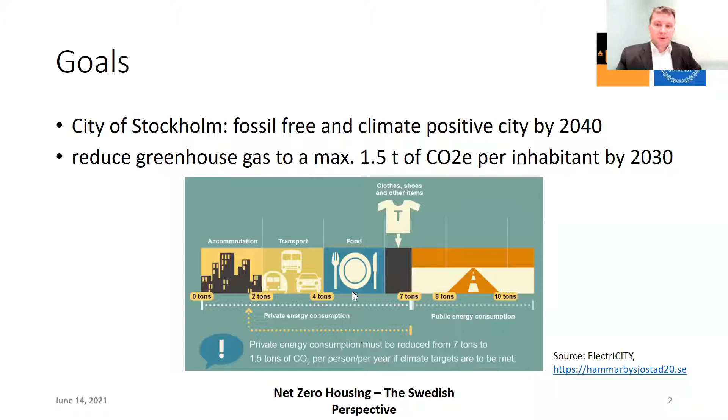So the agenda for today is that we want to look at the users at the beginning. And Elena, welcome. She's a researcher at KTH, and she's connected to the Living Lab here on campus and outside of the campus as well. She will introduce how environmental behavior is driven by consumers, how smart buildings are connected with that, and how we can learn from our experience, mostly from the KTH Living Lab project, where we can test services, products, and methods in real buildings with our students who are living in these buildings.

Then the next speaker, Christina, works for the city of Stockholm, and she will talk about one of the development projects which is still going on. It's not finished, in the district of Norra Djurgårdsstaden, or the Stockholm Royal Seaport in English. And she has insights from the city perspective on what to do for a new development project.

Then the last speaker is Jürgen. Jürgen is responsible for an initiative for the redevelopment of an already developed district in the south part of Stockholm, Hammarby Sjöstad. And he will speak about the lessons learned, because they had a very ambitious aim. They wanted to be twice as good as the city on energy and sustainability targets when they started the project around 20 years ago. And then they realized that it was not possible to reach all the targets.

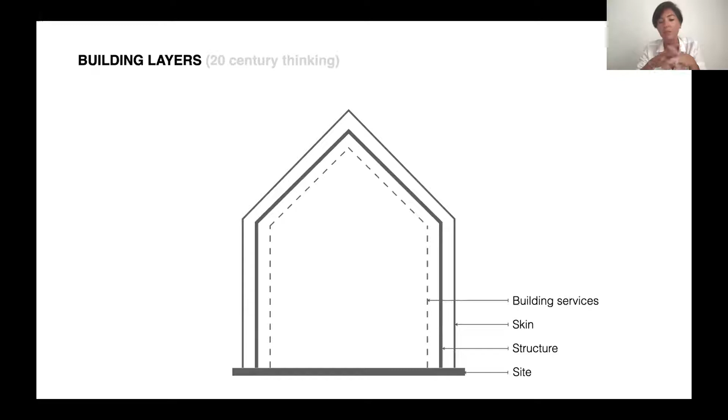The 20th century mindset is about seeing the building as a system of layers, which are site, structure, skin, and building services. That's how we normally create our vision of the building, and that's where we try to create standards, regulations, frameworks and methods around this part of the building. But in the 21st century, a big role in development is played by our lifestyle and how we interact with our environments.

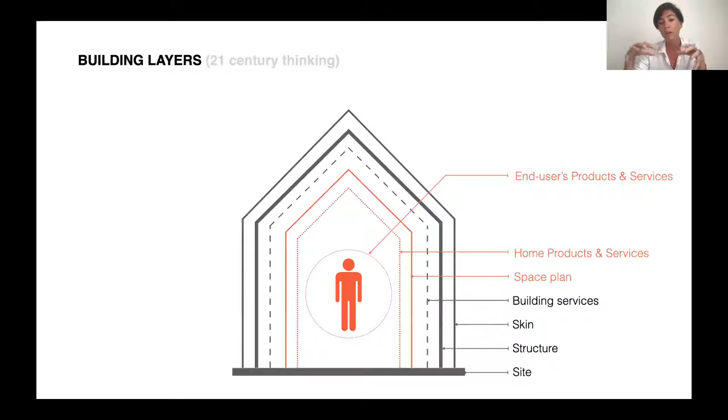That's why we tried to focus not only on the building as a system, which we know previously, but also to understand better how we interact with different parts of our building, which types of products and services we use as individuals, and also a big thing happening today is end user product services. I mean, when my Apple Watch talks with my lighting system, is it building or not? It's a kind of communication which is growing, and that's why we decided to add this as a layer to research.

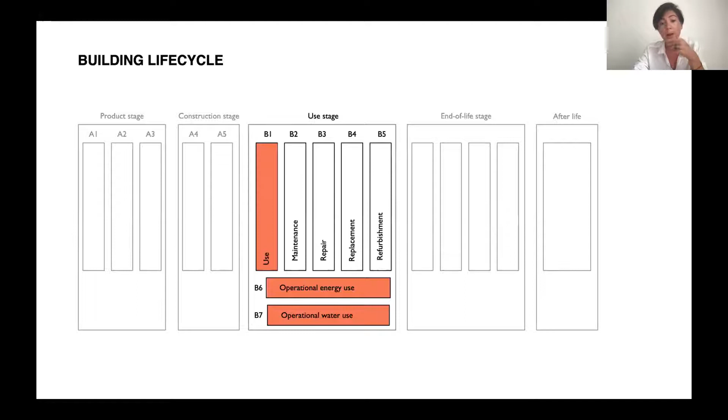And of course, we all know about the building life cycle, and a lot of studies mostly focus on the sustainability aspect of the production stage and construction stage. But now we are moving more and more to the use stage. My research mostly focused on use of the building, with a specific focus on end use: energy end use and water end use. And that's where I found that I need a platform where I can have good access to end users, because if we talk about the building operation stage, I need to really be able to communicate with end users.

And that's how I found that a fast growing track in academia and applied science is living laboratories, which are user-centric open innovation ecosystems. They normally operate in a real life context, they have multiple stakeholders, and they follow R&D procedures and methods. It's a lot about co-creation and interaction between different stakeholders. So that's why I started to search which lab I might land in and do my study in.

But before this, I also researched that the living lab is not just something that's happening now. Historically, we had different stages of this type of process. It actually started in Sweden in the 70s. It's called cooperative design, when Electrolux asked their employees to open the doors of their homes to research how they cook, how they clean their home, and just do analysis of end users' behavior.

Then in the 80s, it moved to some kind of social movement when people gathered and together decided what they want on the street, in their district. And America was full of these examples. For example, the Pecan Street project, where collectively people decided to change their built environment.

Then lately it moved to more like IT garages, where you really could build something and test with end users. And we all know about Google, how it was made on campus, the iterative process of testing. And now what's happening is actually this living lab environment, mostly related to city landscape, where we try to pilot the bigger complex systems of humans, of technology, of landscapes, of environments.

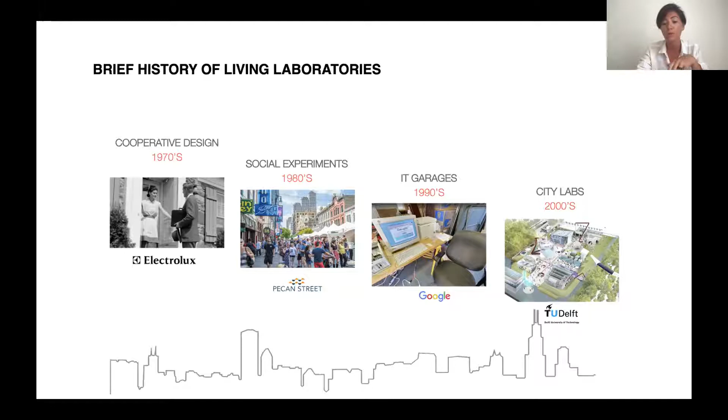And 5 years ago, I started to search which lab I would like to work with. And one lab which I specifically found very interesting is Living Lab at KTH here in Sweden. And I directly signed in that I really would like to do my research here, and that's where I started.

But Living Lab is in many buildings. I specifically focus on one of the buildings in our portfolio, which is built by Einar Mattsson. And this is a building of 300 student apartments, where 4 apartments are classified as research laboratory. It looks like apartments, but it is a laboratory where people are allowed to live. And that was my setting.

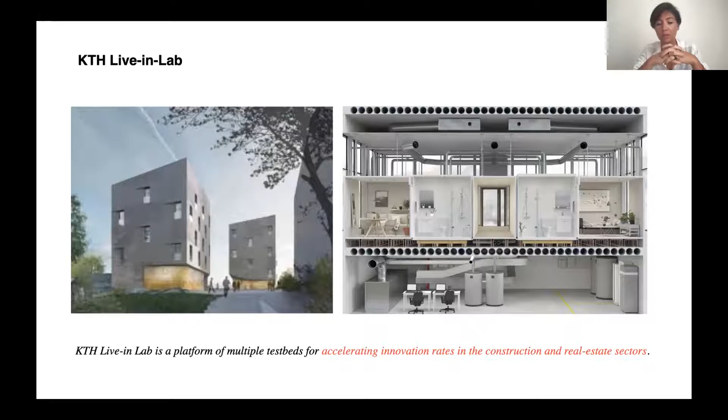I needed to define how I can do my study about behavior and built environment, and I defined also services in this context. And when I started to observe trends and different systems from the point of end users, we have a very interesting graph of interaction between people, products, services, and environments, different built environments, like street environments, office environment, and so on.

So I started to explore how these elements are interacting, and the thing is that most studies, not neglect, but very slightly research people in this context, because we have a lot of papers and research done on IoT, on smartness, on services, on built environments itself, but humans are heavily under-researched. And that's why I decided that in my study, I will try to focus on people, on services, and on the built environment.

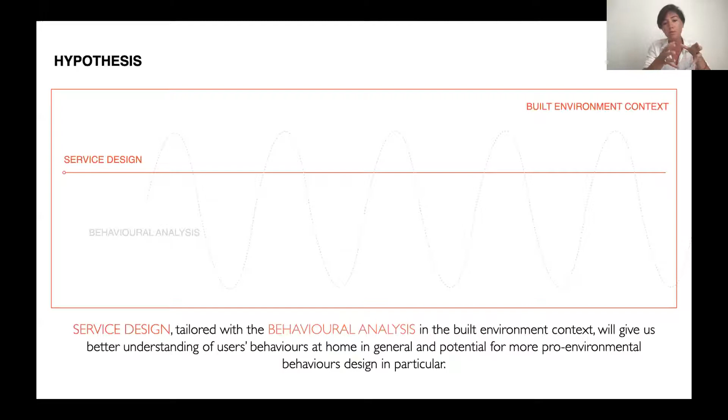And my main hypothesis in my study is about tailoring the design process with behavioral analysis to generally understand how people behave in their everyday life, to understand what are their points of interaction, what are points of negative, positive experiences, and which touch points might be interesting and possible to improve, understanding individual context. So this kind of study starts as a general analysis of everyday behavior with a specific focus on possibilities where we can do some changes.

And of course, theoretically, there are 3 disciplines in one study, which is, of course, building science and mostly building operation science. Then we talk about service science and how design of interaction between users and environment is happening. And of course, it's a lot about behavioral aspects, especially from the point of motivation and decision making and so on.

And of course, we need some supportive theories. And in my case, I used three. Number one was service dominant logic, which actually helps you to look at processes from the point of value creation mechanisms. How we can understand the value proposition from the end user side, and from the stakeholders, companies like building owners and service providers, product providers. So it's a deep analysis of value creation and value exchange mechanisms.

The second theory, which I used a lot, is pro-environmental behavioral modeling, where you also need to plan what is possible in the context of the specific research landscape. In my study, it was either actually contributing to environmental conservation or perceived to contribute. That means either we can save some resources or we are on the way to save some resources. Because of the nature of the study, it was very explorative. I can't do both, but it's actually where we are moving with our study right now.

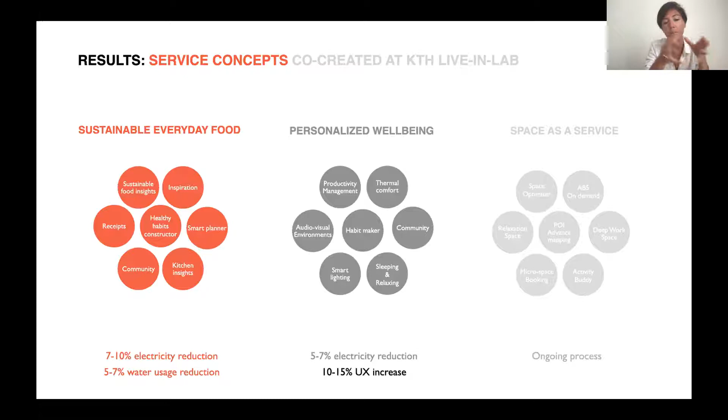And in these portfolios, we did modeling where we see that there is a potential to also optimize resource usage for each of these propositions. And of course, these numbers come from a model, which has some limitations and biases. But then we started to do a case study with each of these themes. And I will just show you how we started to work with the sustainable food system.

So we decided to run an experiment for several months and analyze our end users' behavior related to the food system, where we analyzed how they interact with the kitchen, how they use the apartment for purposes related to food, and also how they interact with the city, because they are getting food from outside the building. And methodologically, we first analyzed our students in the building and tried to create some kind of personas which reflect some behavioral patterns.

And then we zoomed into the behavior of 4 apartments and did very deep analysis of their everyday food ingredients, their shopping bills, deep analysis of the sustainability of food coming to the building, interaction with the kitchen, electricity consumption, water consumption. Almost each step they're doing about food, we did analysis about. And we came to a lot of numbers.

I would not go deep into details, but we identified for different types of people which potential different activities might make some sense. And it's actually very interesting because if we don't do this persona thing, we might really be confused, because some personas have very similar profiles from the point of energy consumption, but their motivation is actually very different. For example, the busy person, they just don't have time to cook, right? They just don't have time. They order a lot of food, but it doesn't mean that they use less energy for it. And that's why we see that indirect energy is very high.

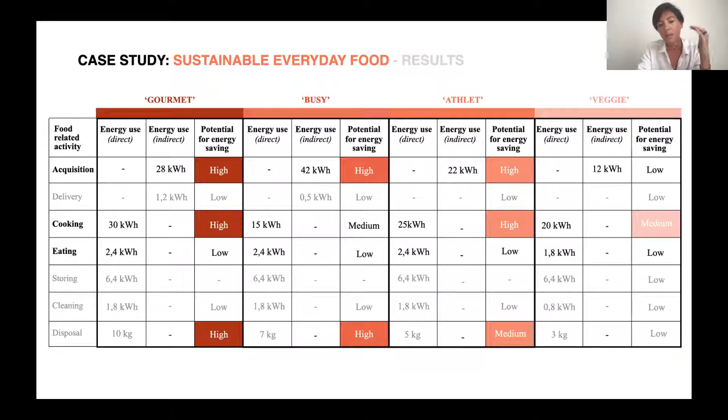So there are a lot of things which you can understand only if you understand who these people are and what drives them to behave in a specific way. This kind of analysis helps us to define some strategies for different types of people. And of course, then we need to scale out, because for people, zooming in is not enough for statistics, but when we zoom out and bring it back to a persona kind of portfolio, we found that there are actually pretty good numbers for how much they can save.

And again, this is not a generalized study, it's a pretty individually driven approach, which can have success because it might be systematic. When something works for an individual and that individual accepts a specific change, it becomes a habit. And our task is not just to change behavior, but to build habits. And after the study, we found that there is actually pretty high potential to do it on a systematic level.

And I would like to finish with an interesting quote from my mentor: we must design for the way people behave, not how we would wish them to behave.

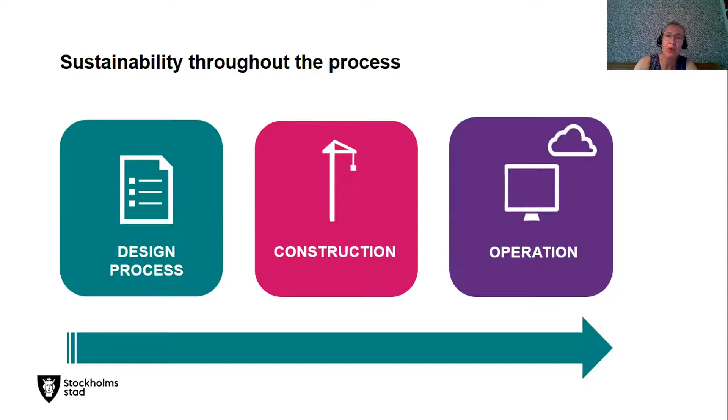And then after the developers start to come up with different documentation, such as the preliminary design documentation, system design documentation, and so on, we start to monitor. So we are asking for different kinds of verifications. And especially when it comes to energy performance, we are monitoring at 5 different stages, just to ensure that the developers are really complying with the requirements set. So it's really important that sustainability is going throughout the whole process, from the early design processes until operation, where we're going hand in hand together with our developers.

Now I wanted to talk a little bit about one of our phases, which is called Brofästet. This is a phase consisting of around, I would say, 9 developers, and covers around 700 apartments. And we were setting the requirements such that it should be half of the national building codes. In that sense, we defined it as a maximum of 55 kilowatt hours per square meter per year. This is including heating, hot water, cooling, and property electricity.

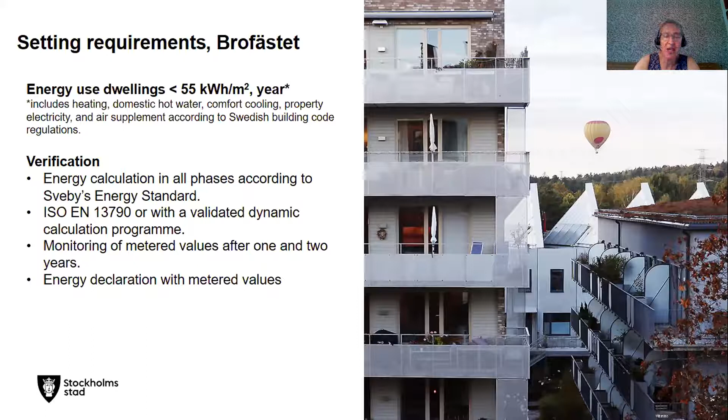And we're also asking for very clear verification. The energy calculations have to be done in all phases, from program until operation, 2 years after occupation. And that has to be done according to Sveby's standard. And the energy calculation has to be done according to an ISO standard or a validated dynamic calculation program. But the monitoring of metered values has to be submitted after 1 and 2 years, and an energy declaration has to be done with metered values and not projected values.

So when we are looking into this phase, you can see here this diagram. On the x-axis, you have the developers, on the y, you have the kilowatt hours per square meter. And you can see the orange rows are showing the set requirements for the Stockholm Royal Seaport at 55. And on the gray row, you see the National Building Code, where the requirements are.

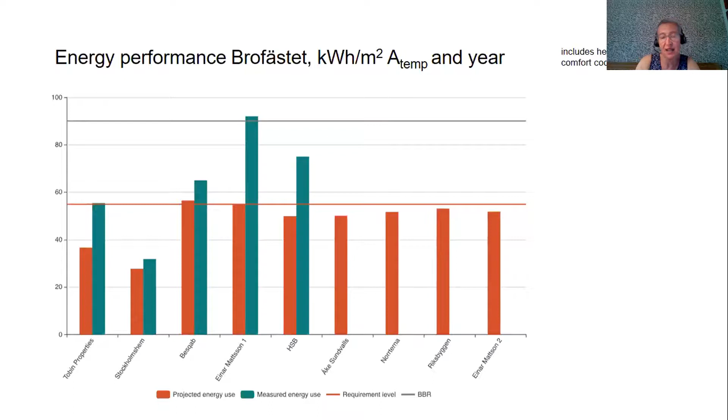And when you're just looking at the orange staples, you see that developers are actually fulfilling completely the set requirements at the Stockholm Royal Seaport. But when we're looking into metered values, which are the green staples, you see suddenly that it doesn't really comply anymore. And that was actually really surprising to the developers and also to us, because we were following the developers on quite a long journey, really following them on the programs and detailed design documentation, where they fulfilled it completely. But then something happened during construction and operation.

There's also something I need to mention here. Everything is, of course, depending on how you calculate. We have specific accounting principles in the Stockholm Royal Seaport due to different reasons. The first is that all electricity used for heating and hot water needs to be weighted by the factor 2, multiplied with 2. This is because we want to assure technical neutrality. It doesn't matter where the energy is coming from. Is it from the district heating? Is it from the sun? Is it from the geothermal? It has to be technically neutral.

And then the second is that the locally produced renewable energy may not be credited. And this is also because we want to avoid, as we say in Sweden, technical Christmas trees. We want to assure that the buildings have a very good climate envelope with very well insulated facades, roofs, floors, windows, and so on. But we also want them to produce renewable energy on the roofs and on the facades, of course, but it should not be used to compensate.

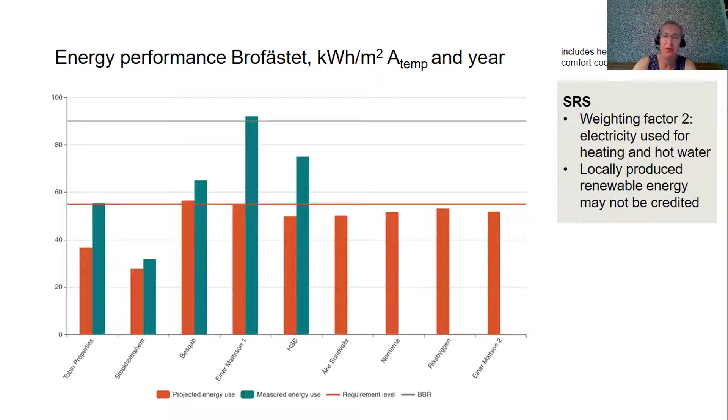And I should maybe mention also the second developer, which is called Stockholmshem. This was actually the result of a land allocation competition where we asked the developers to compete on plus energy houses. So this building from Stockholmshem is actually a plus energy building. And we have seen now after 1 year of occupation that it is actually proven that it is a plus energy building, which means it's producing more energy over the year than it consumes. So everything, as said, is about how you're accounting, of course.

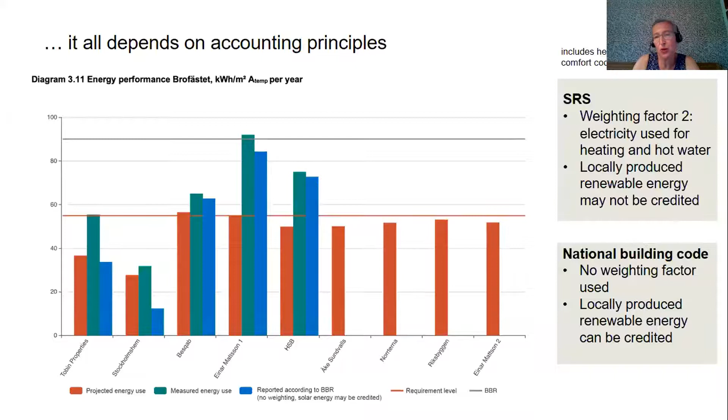So what happens? Why is there such a big difference between the projected and the metered values? When we look into the project planning, we were reviewing all documentation, and all documentation was showing that the developers would be below 55 kilowatt hours per square meter. However, we could see later on that the hot water circulation losses were underestimated. The efficiencies of the different components were overestimated.

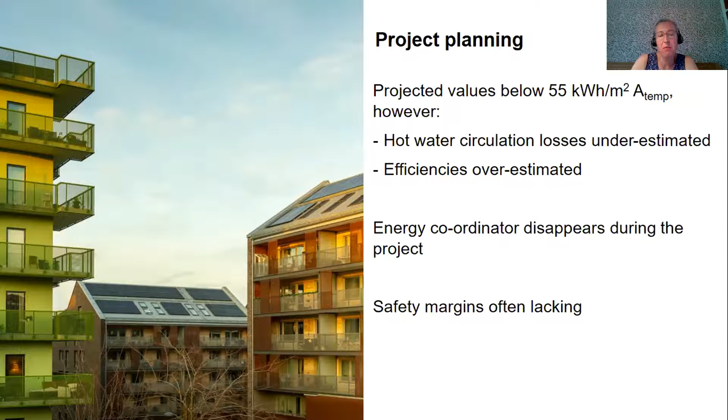In the first phases, they had an energy coordinator connected to the project, but the energy coordinator disappeared more or less after some time. So it was not following the whole process. We could also see that the safety margins often were lacking, which is also a problem.

Coming into the construction phase, even here, we were reviewing the documentation very thoroughly. And there we could suddenly also see very, very big deficiencies in the handover from the project planning to the construction phase. So it's a lot about communication here. We could also see very, very big deficiencies when it comes to the quality assurance during the construction phase.

So we had components that were incorrectly installed. We had meters which were faulty or incorrectly mounted, and they wouldn't know it 2 years after. We had thermal bridges suddenly arising due to deficiencies in the quality assurance.

Windows which were very well insulated in the projecting phase were replaced with windows with worse U values, for example. And we could also see in Brofästet that they started to install wastewater heat exchangers, which means that they would use the heat from the wastewater to bring it back into the buildings. And they were very often incorrectly installed.

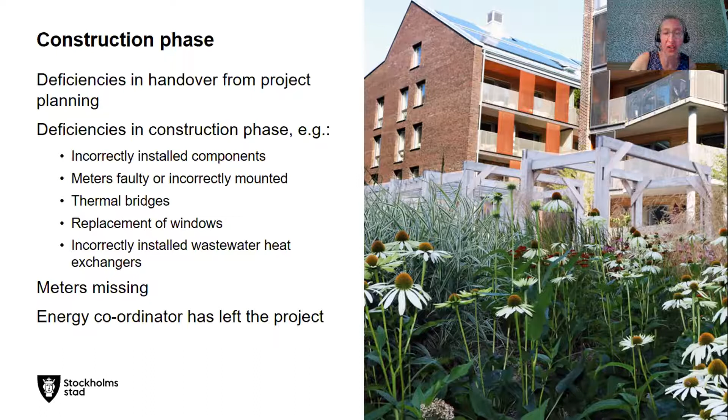Then we also found out that a lot of meters were missing. And the energy coordinator had definitely left the project, so there was no energy coordinator left. When it comes to commissioning, we could see that there were some deficiencies also in the handover routines, especially when it comes to monitoring routines.

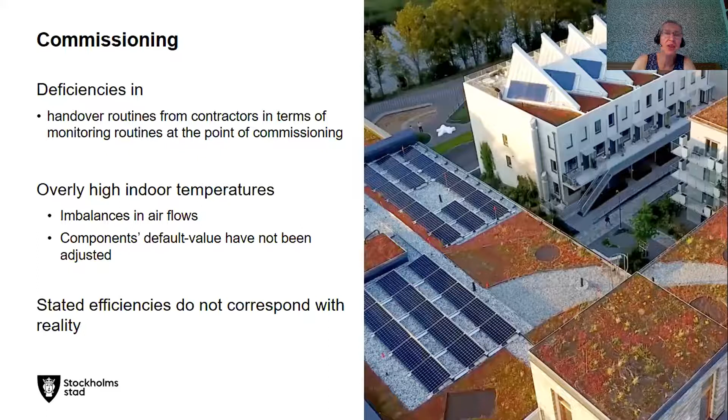Another problem is that we detect in nearly all houses very high indoor temperatures, about 23 degrees, which is much too high, of course. Imbalances in airflows, and the components' default values have not been adjusted either. And as I mentioned before, the stated efficiency from the material suppliers did not correspond with reality.

And the property electricity use varies a lot, and this is still what we are discussing a lot. So we have ongoing discussions with our developers to find out what happened, why it happened, and what the problem actually is. And in the beginning, as I mentioned before, they wouldn't know. So we are still working a lot with troubleshooting and corrective measures. The work is ongoing.

So right now, on average, it is about 65 kilowatt hours per square meter, which is quite good, but it's not good enough. We also found out that the developers really need to improve routines and knowledge. We had a lot of discussions with the different developers, and they are very thankful that we really help them to find out what's wrong.

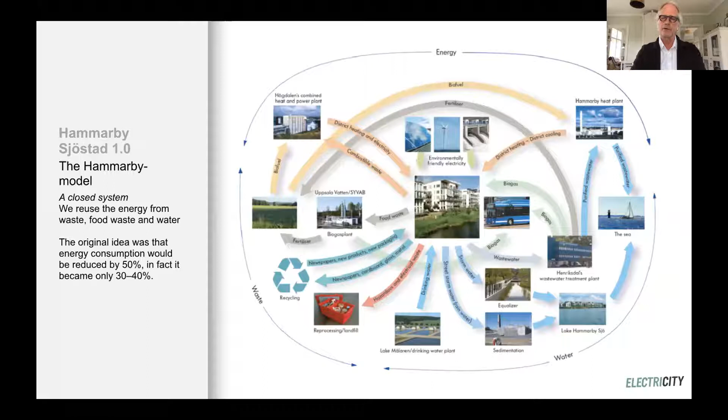So the original idea was that energy consumption would be reduced by 50%, but in fact it became only 30 to 40%, which is not bad, but there is room for improvement. So the transportation goal has been achieved in Hammarby Sjöstad, much thanks to a local tram that goes in the middle of our city district. We have buses, a lot of carpools were initiated. We have bicycles, e-bikes, and what have you, for sustainable transport.

But the energy target was not reached. The district heating and cooling is over 100 kilowatt hours per square meter in a year, and it was supposed to be around, back then, was it 80 or something? No, actually it was supposed to be 100, but it's over in a lot of houses, sorry.

So Hammarby Sjöstad is still growing, and this is Stockholm New, built by Skanska here in Hammarby Sjöstad. And we're setting new standards on buildings in terms of energy and climate. And today we're about 25,000 people, and we will be about 35,000 people by 2030. And there will then be workplaces for about 20,000 people. A lot of co-working spaces as it is right now.

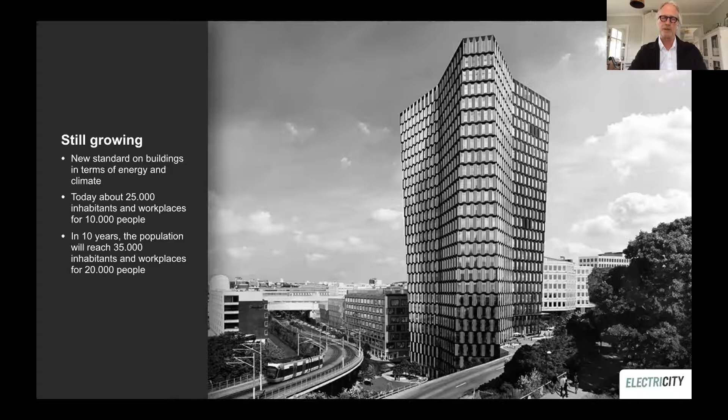So Hammarby Sjöstad 2.0 is our project in our citizen initiative. And it was started in 2012 around a kitchen table by an old finance minister here in Sweden called Allan Larsson. And by 2015, we started ElectriCity, which is a collaboration with companies, municipalities, academia, and citizens. So we see ourselves as a testbed for energy, e-mobility, circular economy, and digitalization. So we're like a living testbed with 25,000 people. And we work with knowledge and education a lot as a carrier for behavioral change.

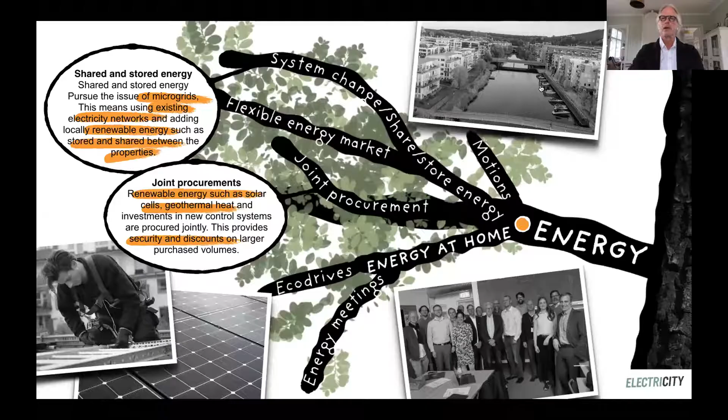And I'll show you a little bit more about what we're doing when it comes to the microgrid here in Hammarby Sjöstad. So we're installing solar cells on our roofs. We're installing battery storage in our properties. And then the houses share energy through the existing electricity grid. And that goes through an LSO, a local system operator, and then to the electricity network owner.

And there are a lot of business models to figure out here, of course, on this flexibility market, and tax laws that have to be changed in order to make this profitable. So this is a 4-year project, and we're in the beginning of this journey.

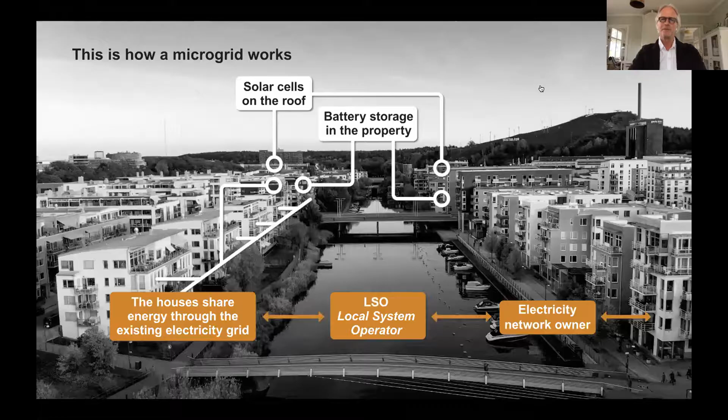Let me get into transport. We had some 500 to 600 people trying electric cars some 6 years ago. Everybody was really enthusiastic, but nobody bought the cars because they didn't know where to charge them, of course. So we initiated Charge at Home, which is once again a joint procurement, now of charging infrastructure, that has resulted in cheap and smart home charging.

So by now we have over 1,000 chargers in our garages, 25% coverage. We also formed something that we call an informal zero zone, which is joint procurement of transports with requirements for conversion to electric power. That is all the trucks and the maintenance people coming in every day doing stuff in Sjöstaden. If they get a bigger pile of business, then they have to convert to electric. And that has been the case now for many entrepreneurs.